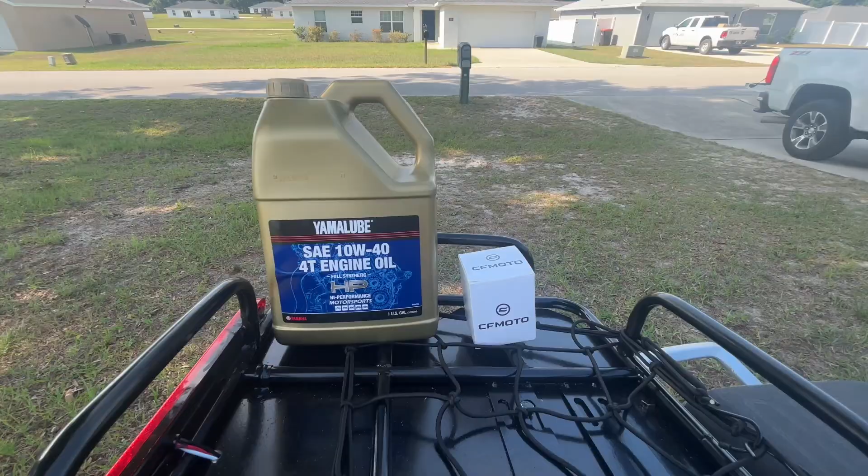I bought 2 oil filters and 2 gallons of the full synthetic high performance motorsports Yamalube. This is what St. John's said they would use if they were doing my oil change, and that this is what they think is the best oil for this. And again, this is basically a baby Tenere. I keep telling everybody it's the unicorn.

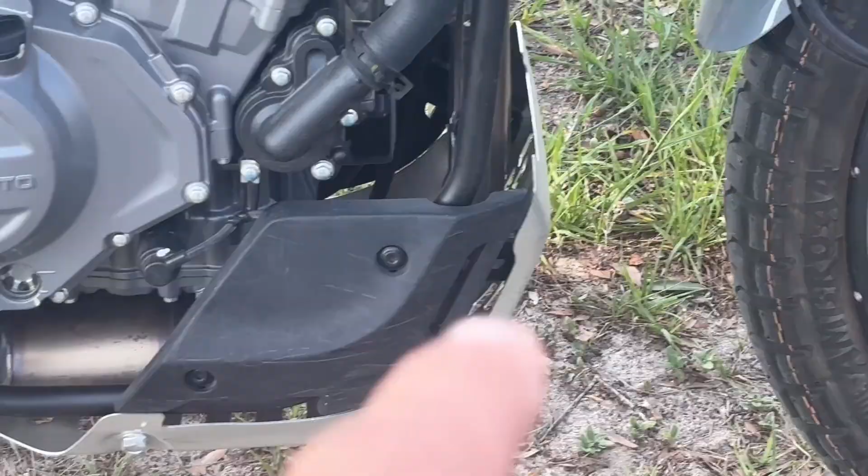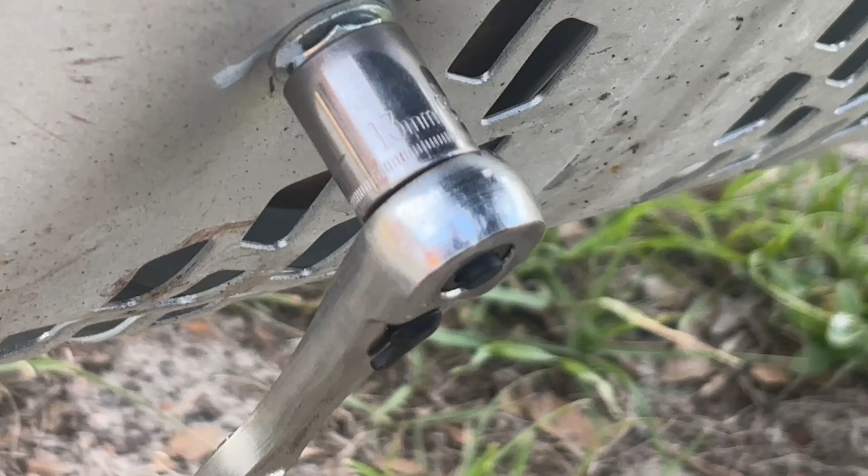So the front sprocket is also compatible with the Yamaha. And we will start off - I'll go ahead, I really don't need to, but I'll pull the skid plate off for this. That is a 13 millimeter, and you can use a 12 point, but I'm going to use a 6 point because you do better with a 6 point.

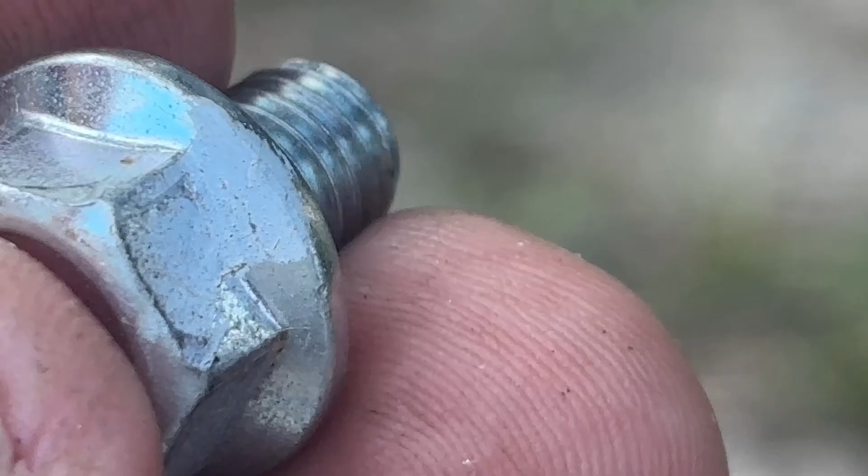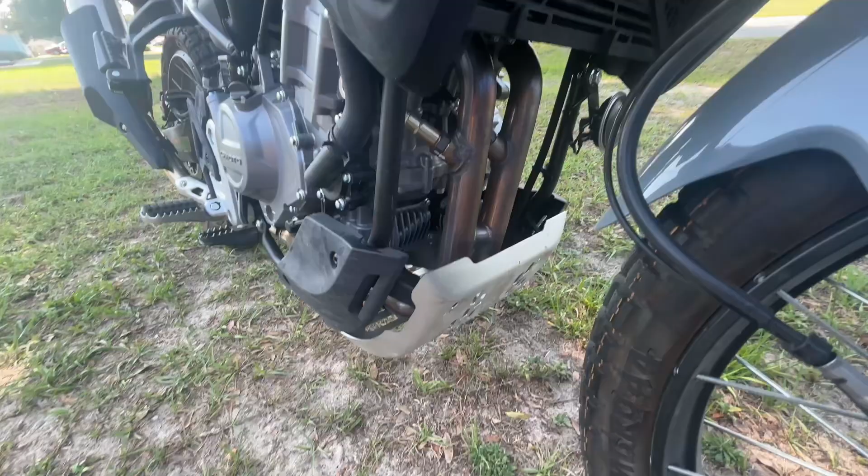Another shout out to CFMOTO. I've been telling you how they use the marking pen. They marked this bolt and they marked the hole where the head of the bolt lined up. We'll just back out of it a little bit to where you could tell when they were originally put on, so you could tell they weren't backing off. And they did that to all of them. So kudos again to CFMOTO. They seem to really be picking up where a lot of people have left off.

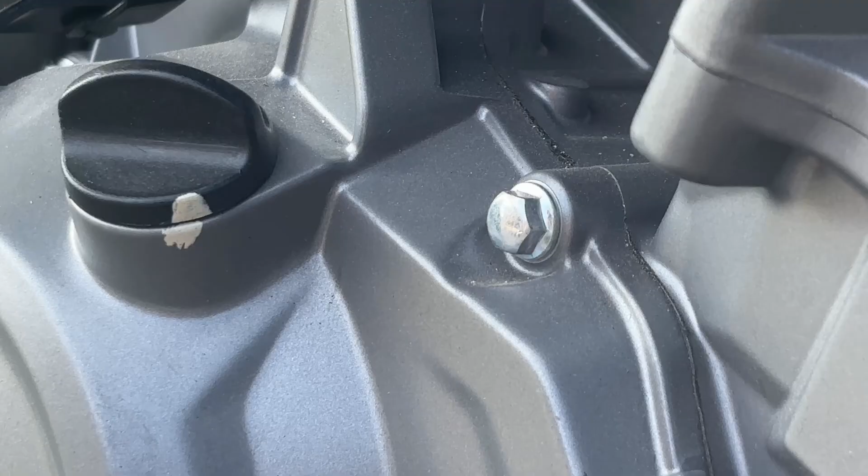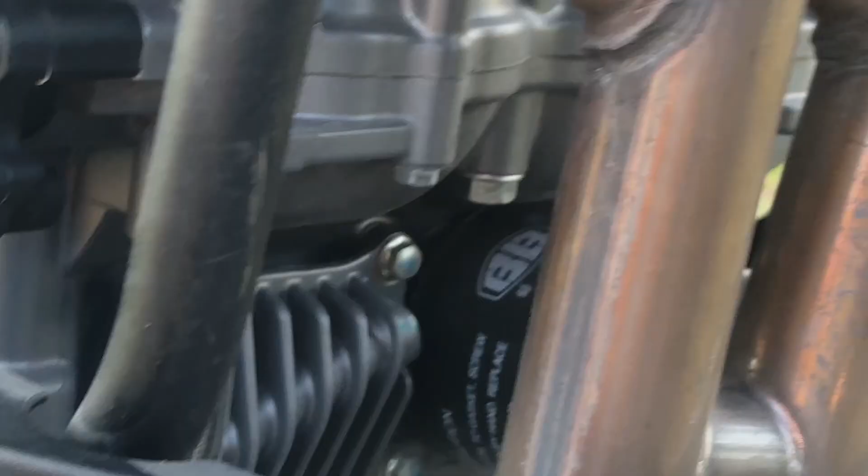And see, here's one just right here, and that's just the oil cap. I've checked the oil, I've removed that, but it comes back to almost the exact same spot. They do it here, I mean, it's on there. They do it in a lot of places that seem to be important. And that little booger right there, that's going to get replaced before I leave, that's for sure. So there we have it, 4 bolts, and it's off.

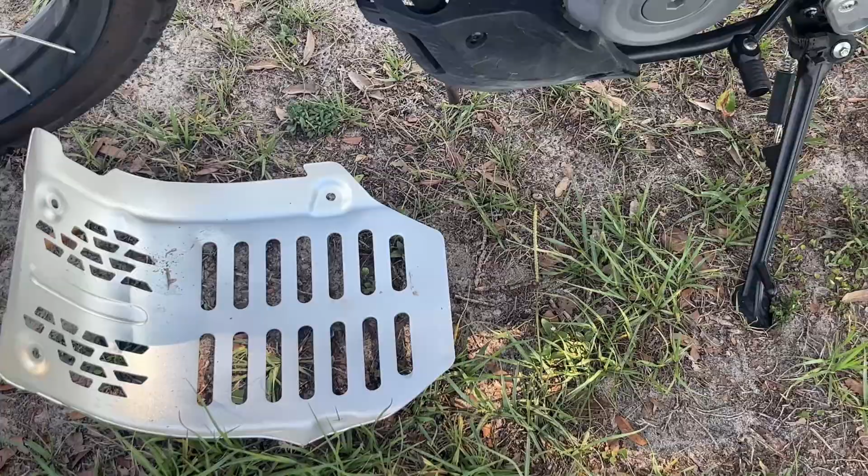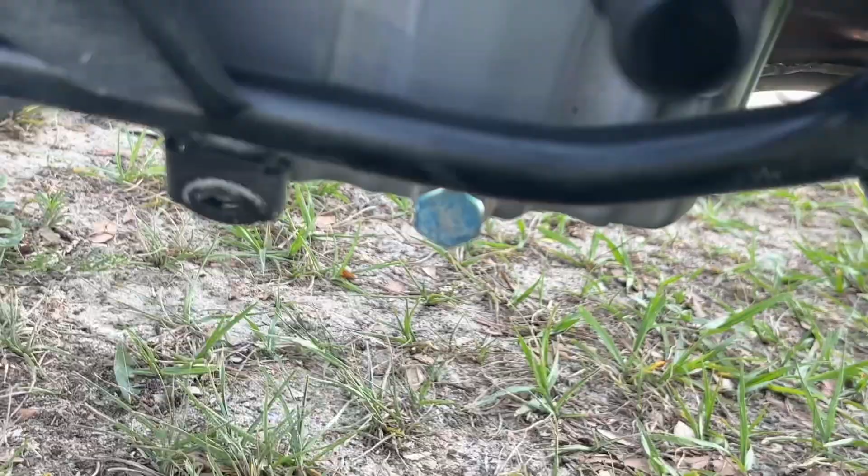Like I said, they're 13 millimeter, which is 1/2 inch. The nice thing too is your oil drain plug is on the side, at the low point when it's on its side stand. And the oil drain plug is a 17 millimeter. Now when you look at the drain plug, you can see the crush washer behind it.

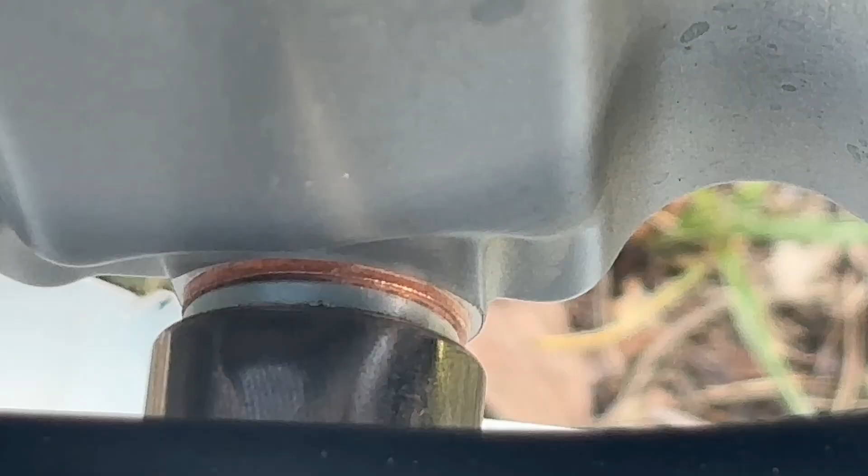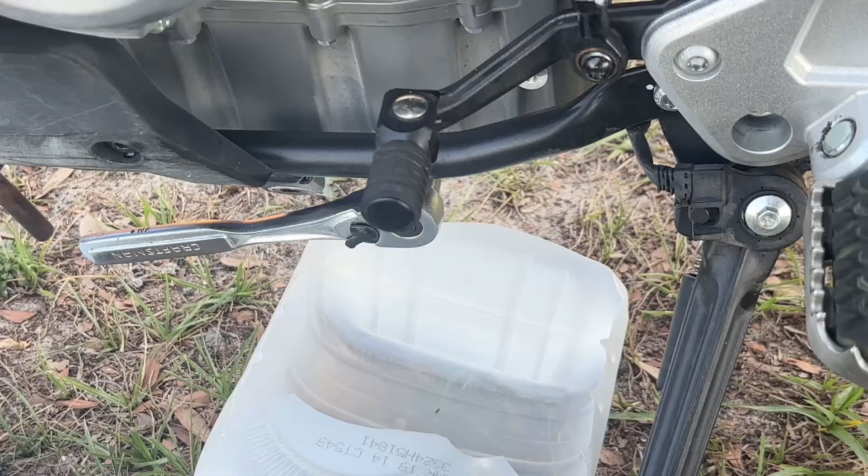Make sure you get a crush washer. Now I've been out in the field to where I just had to use the same crush washer, and I was able to turn it around and get a fresh crush. And now looking again, you see as I'm turning this out, see the blue mark? From underneath, that was in there tight.

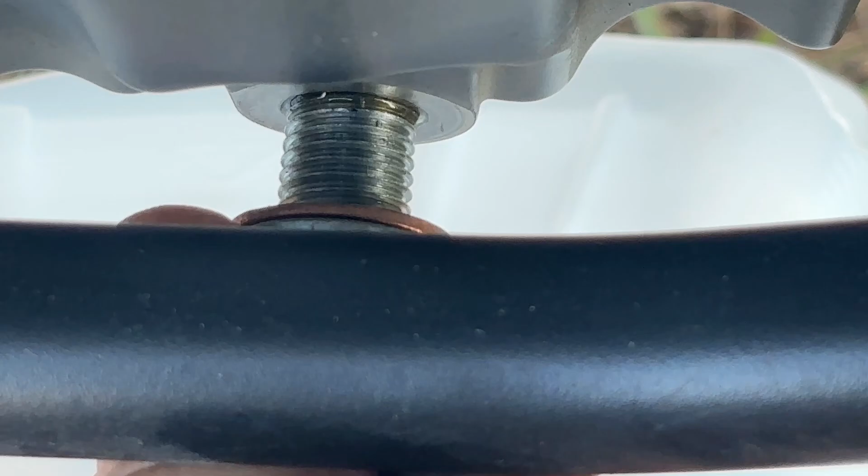And I'm gonna hold pressure against it, okay, till I feel it slide, knowing that it's actually all the way out, but I'm trying to push it in at the same time, because what that's doing is keeping the oil from going everywhere. So I'm trying to push it in while I'm turning it out till you feel it go past once. There we go, see that?

And there's where I bought my bikes. I bought the NK 450 first, and now I bought the MT or the Ibex 450 second. I bought them both at St. John's.

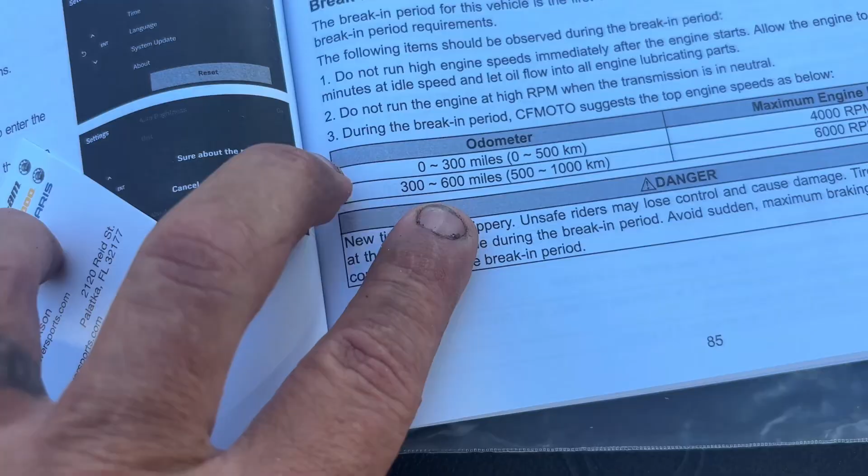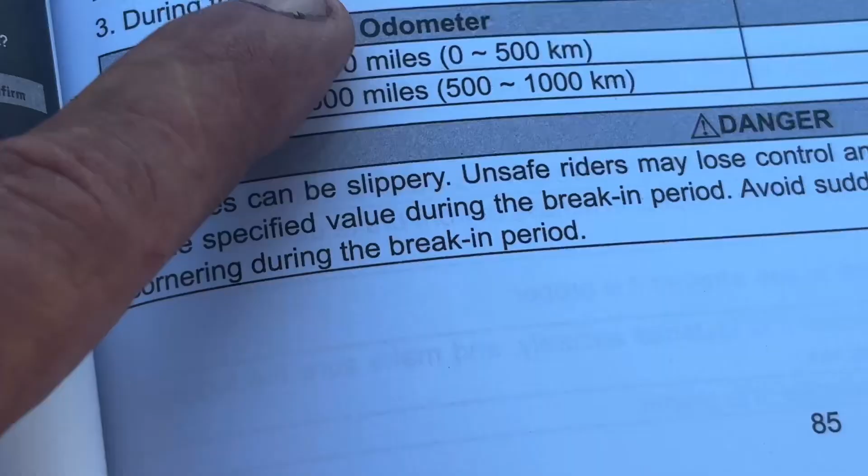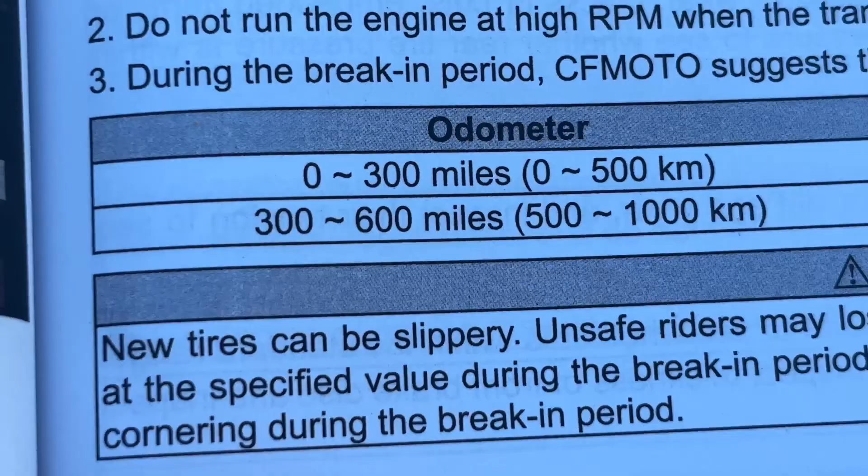And see, odometer 300 to 600 miles, which is 500 to 1,000 kilometers for your first oil change. So there you go, that's your proper break-in. You can go up to 600 miles. And when I went in for the sprocket at 450 miles, he said my oil looked good enough to go to the 600. I could have, would have, should have, possibly, maybe done this first, but I didn't.

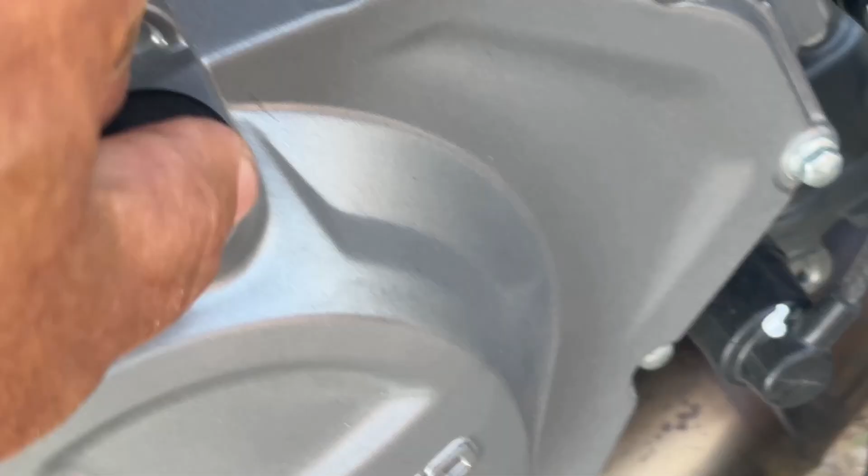So now we're going to loosen the oil cap. And again, see the paint mark? Redundancy, it's key, but I love it.

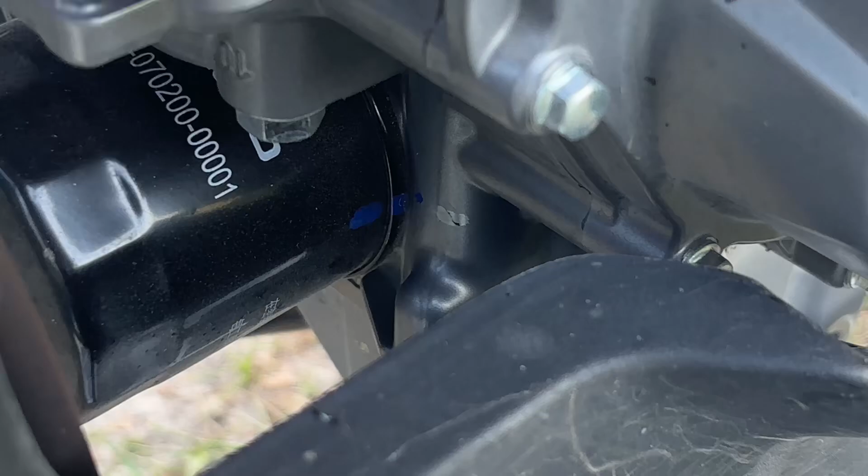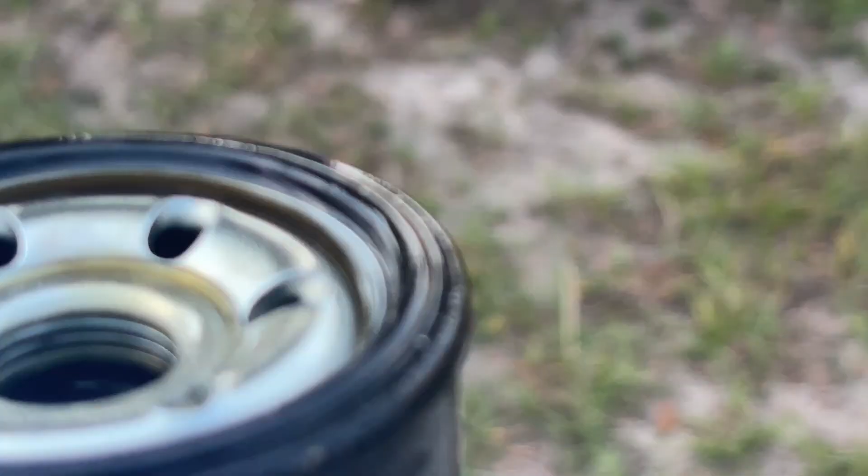I'll go pull my oil filter now, and I'll get you the amount of oil that it takes. And what do we have here on the oil filter? Again, it's marked where it was to ensure that it never came loose. When you take your filter off, you might want to check your box, make sure you got another rubber seal there, because you might need that. All right, right out of the box, we have our new rubber seal.

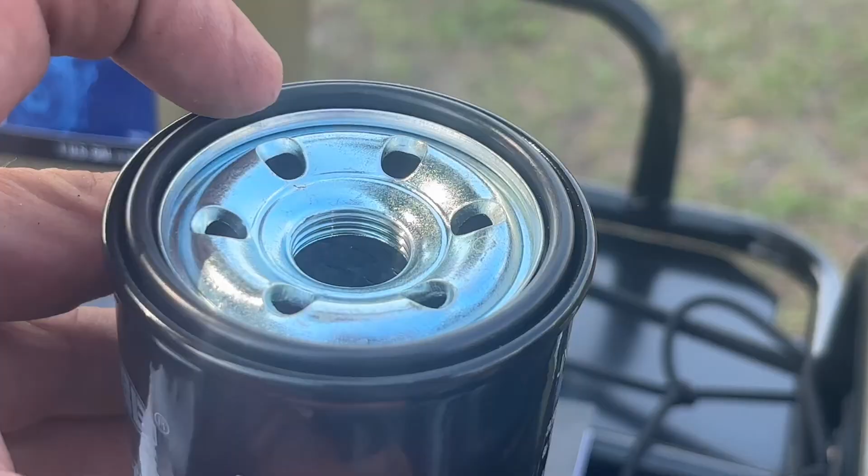Now you're going to want to take some oil and oil the threads and oil your seal before you put it back up. Always get it wet with oil. Well, there we go, it even says it: apply a film of oil to gasket and screw on filter tightly by hand. Replace filter every 6,000 kilometers or 100 hours.

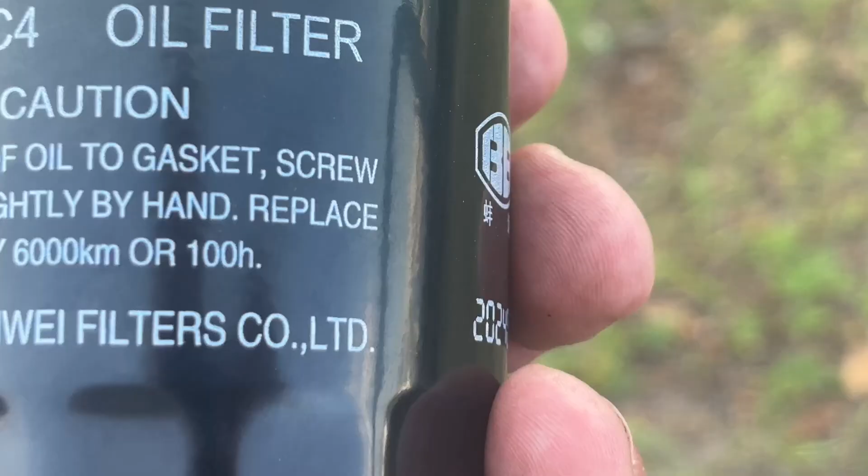So there we go. And 6,000 kilometers is 3,700 miles. So yeah, when you hear people saying they did 6,000 K, that's only 3,700 miles, so almost 4,000. The only thing I'm saying is, when I tell you I'm probably going to be doing between 11 and 14,000 actual miles, you know, because pin to pin was 10,000.

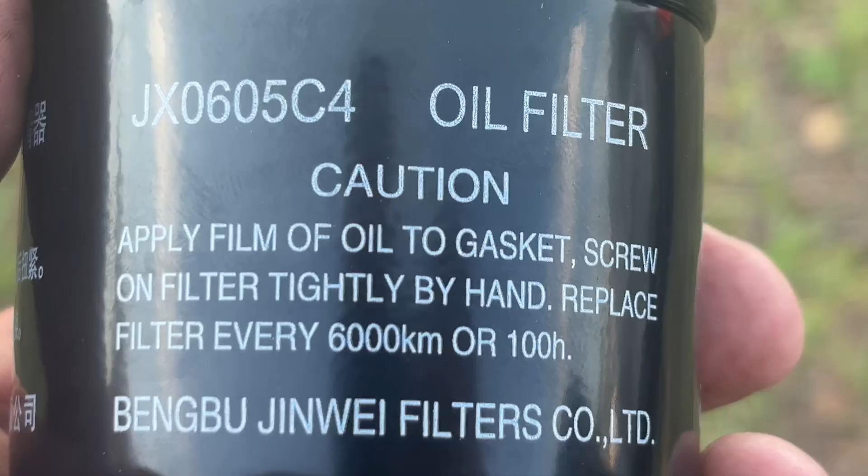So we're going to be close to 20,000 kilometers when we're done. Now you can see we've got our white and blue mark here, and if you look, that's pretty much even with the Chinese lettering just below the C4. Well, I don't know a veteran that doesn't love C4, so I won't forget. That's just below the C4 mark.

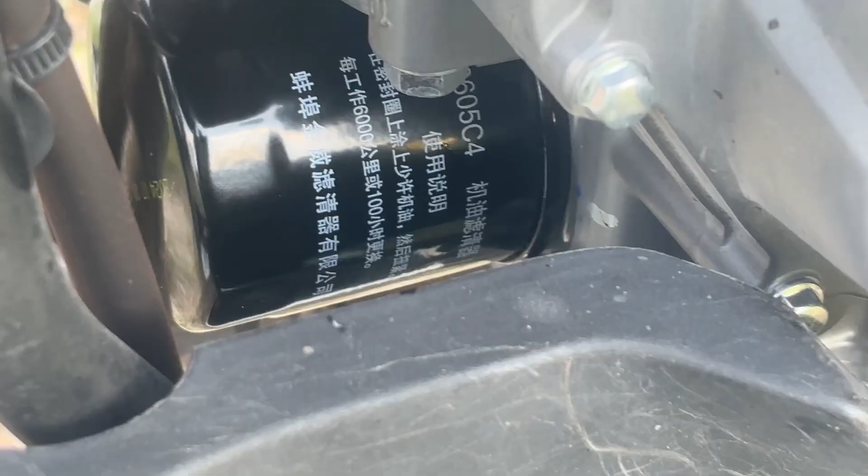Anyhow, you want to put this on hand tight. Now I got fairly decent strength, so I'm able to really snug it up really well. I can get my whole hand in here and everything. There we go, I even got more after it set for a minute.

So now we are at the C4 mark. Check that out, we're dead on the C4. And I'm telling you, I really put a torque on it with my hands as good as I could, and that was as far as I could go. But after it set, hey, I don't know, go figure, right? Anyway, it's there. So I'll never forget where that's at now.

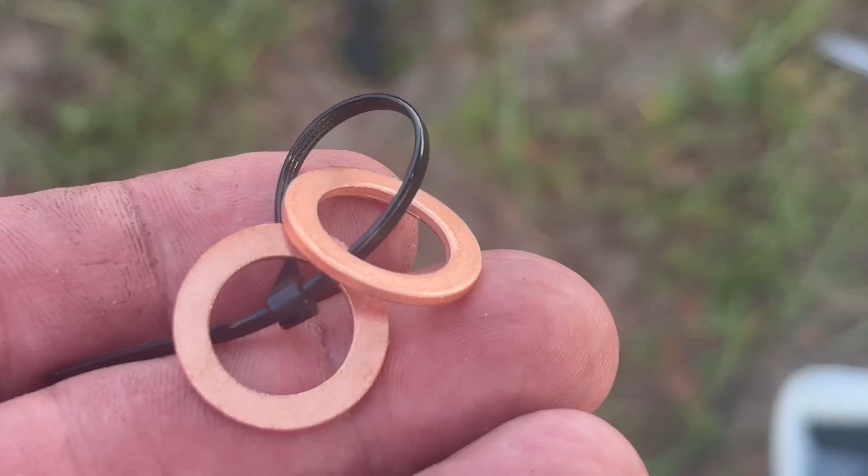So I did get 2 crush washers with the oil filters. In the past, even talking to a friend of mine, we've reused crush washers for multiple uses, but they don't recommend it at all. I would turn it around once without any hesitation. You should be able to get 2 oil changes out of a crush washer, but that's against every rule, every law, every book. So don't do what I do, as I say, not as I do.

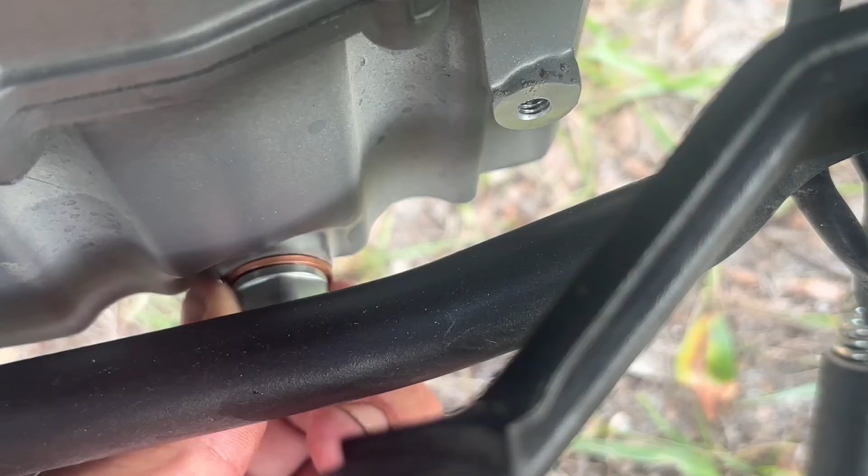Yeah, there you go, oh my God, I'm my dad. You see this? Hand tight all the way in. You should have absolutely no problem putting that all the way on before you put a wrench on it. And make sure your crush washer's in there before you put the bolt back on.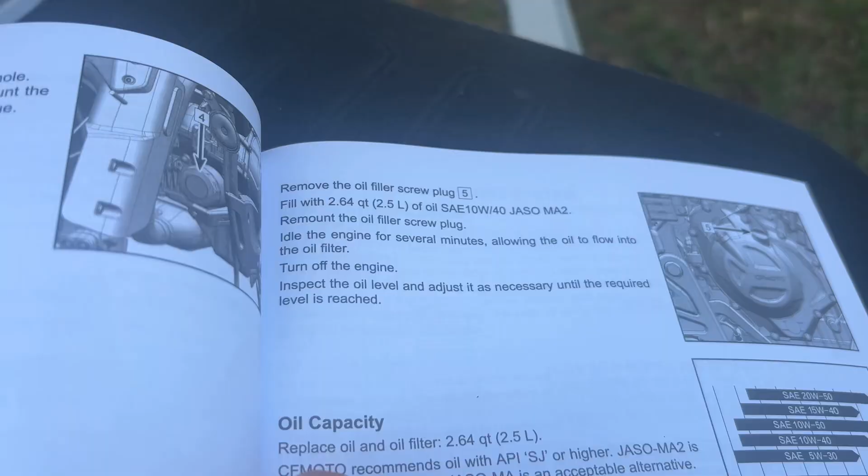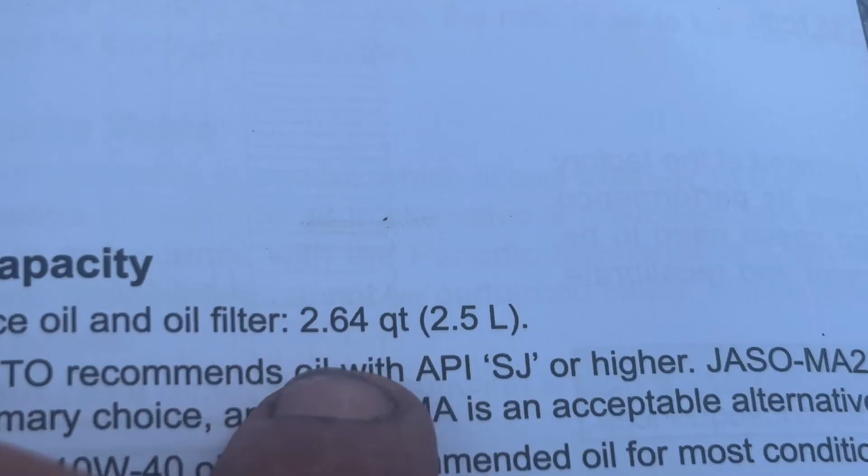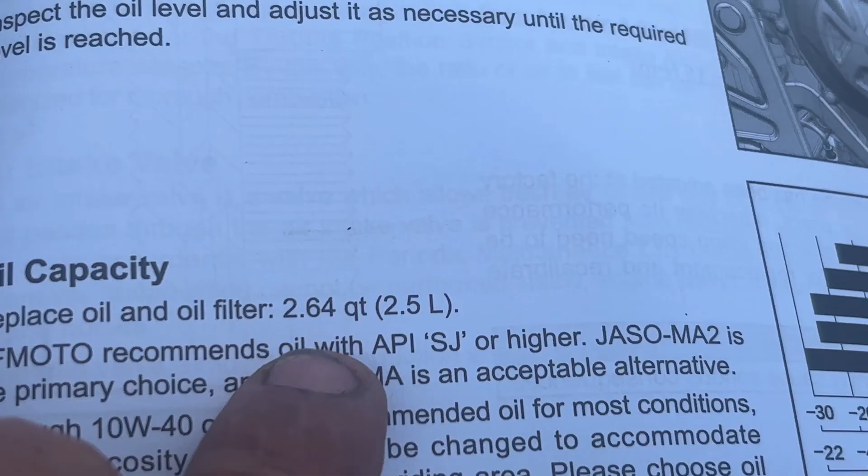It says first remove 2.64 quarts, and then it says replace 2.64 quarts. Go figure, 2.5 liters, my friends. So there's 4 quarts in a gallon, so I'm going to actually have 1.36 quarts left times 2. So guess what I got? I have enough for 3 oil changes because I bought 2 gallons.

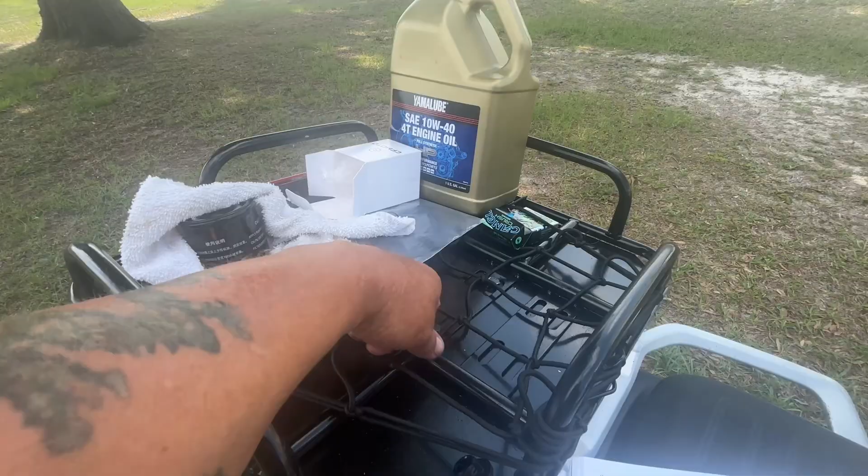Anyway, I'm gonna bring the oil and the other oil filter for my other oil change, along with the extra crush washer. Don't forget those.

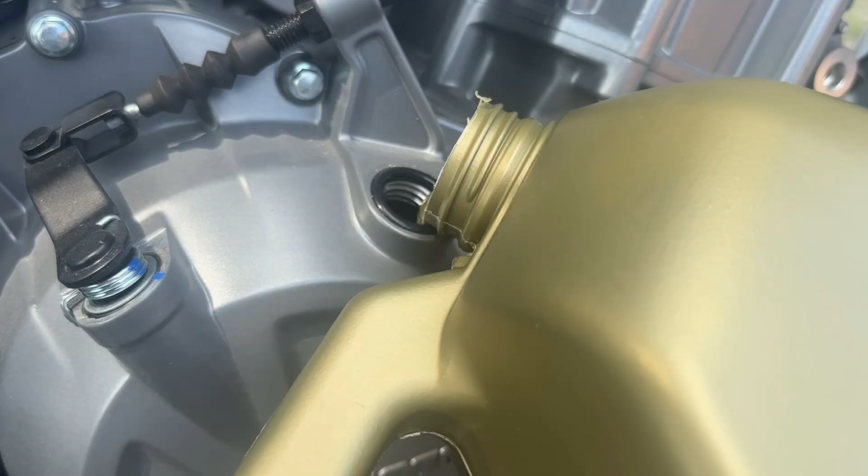I recommend, if you haven't done this, getting a small funnel. But if you're gonna pour from the jug, the secret is not doing that—don't do that. You got to turn this to the top, turn your spout to the high side. Okay, I'm holding the jug, leaning it on the engine block, because I'm holding the camera in my other hand. Otherwise I would hold that about 1 inch high.

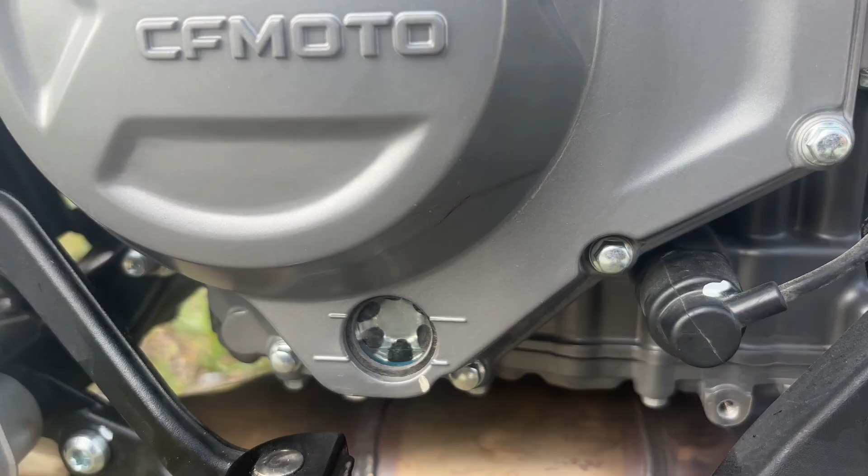I'll show you, I haven't started it yet. So when I stand the bike upright, it's just maybe slightly over the line, but we have not started the bike yet. So once that goes in the filter, I imagine it's going to be down between the 2 marks, maybe 3/4 of the way. We'll find out here in just a second.

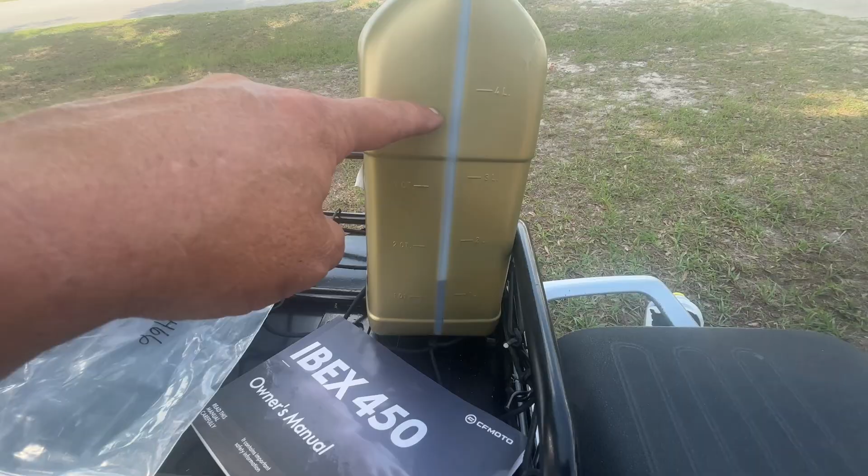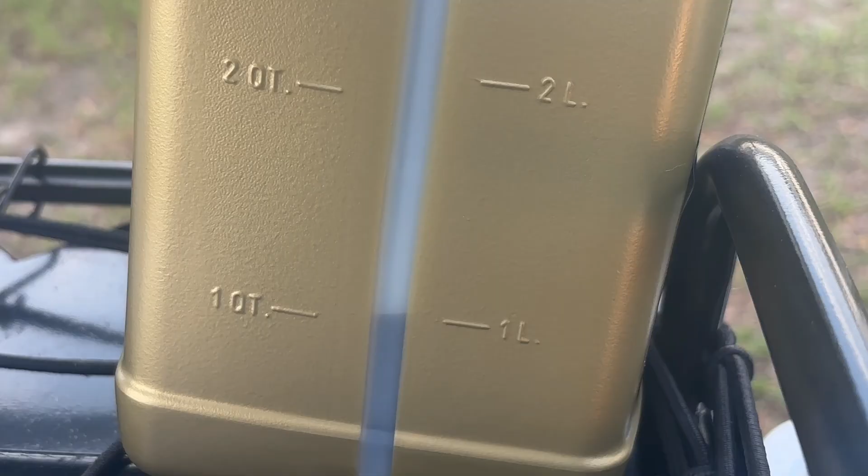We know we're good. You start off here going in reverse, 1, 2 quarts, so you're going to be just over halfway down. So if that's 2.5, you want to be just under it. And when I hold the jug up straight, because the bike's leaning, we're right about the 2.5 mark. And we're good on the oil mark. So let's start her up, find out.

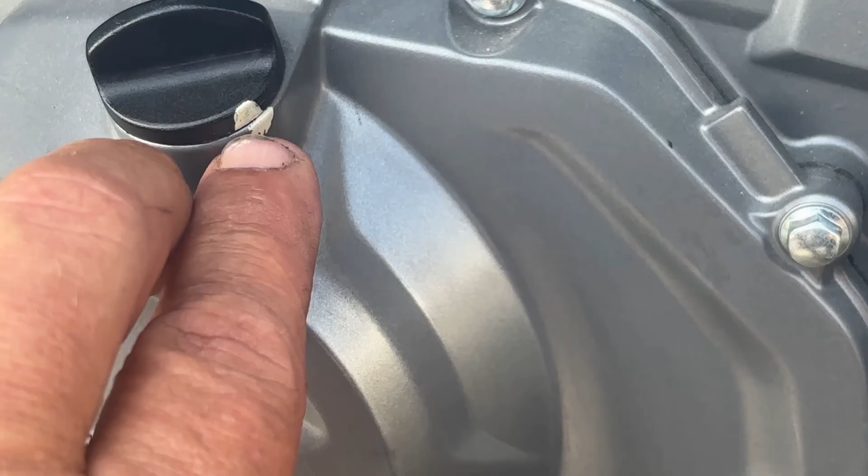Putting the oil cap back on, now that's been on and off a couple of times, it's just slightly past the original mark. See, they even did the springs. I'm telling you, they really do these things right.

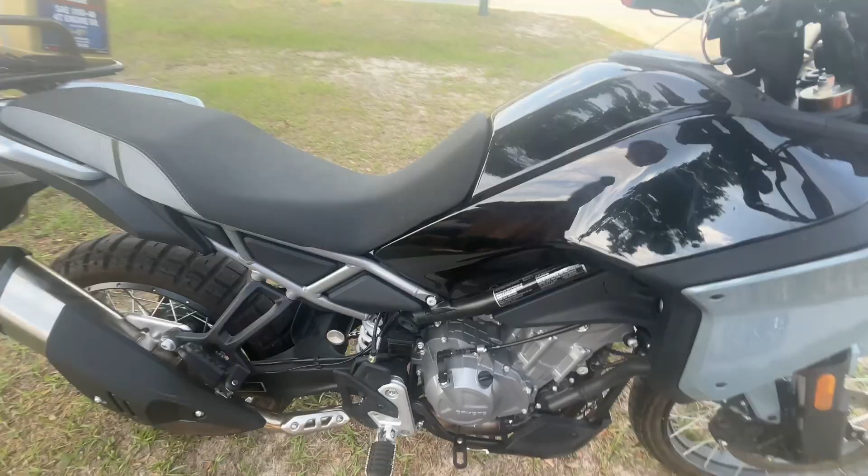So with that being said, let's start it up. We'll let it idle for a minute, and then we'll check it, turn it off, let it settle. But I'll let you hear the first startup.

I do got my water jug holder there, so I have water until I get a CamelBak. I got to get a new CamelBak.

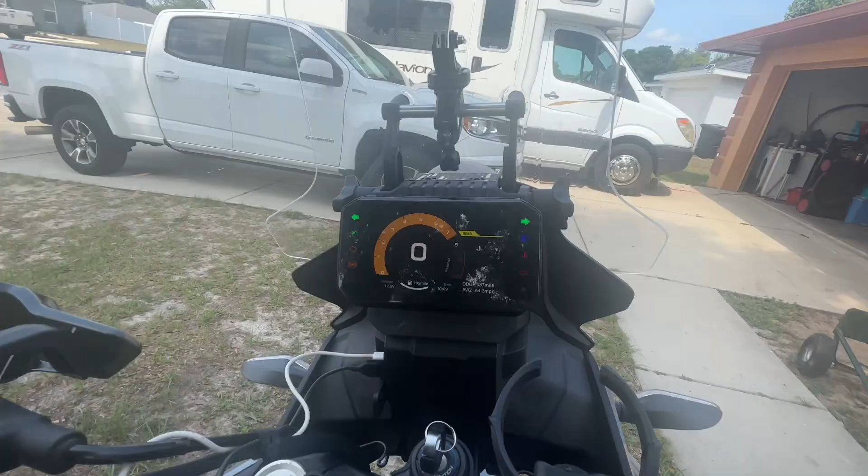All right, so we're in neutral, and we're going to start it up. There we go. Let it idle for a minute. Circulating that beautiful new oil.

You notice I let it run for approximately a minute before I even just barely loosened the throttle to push out the oil. Now we'll let it settle for a minute and we'll check it.

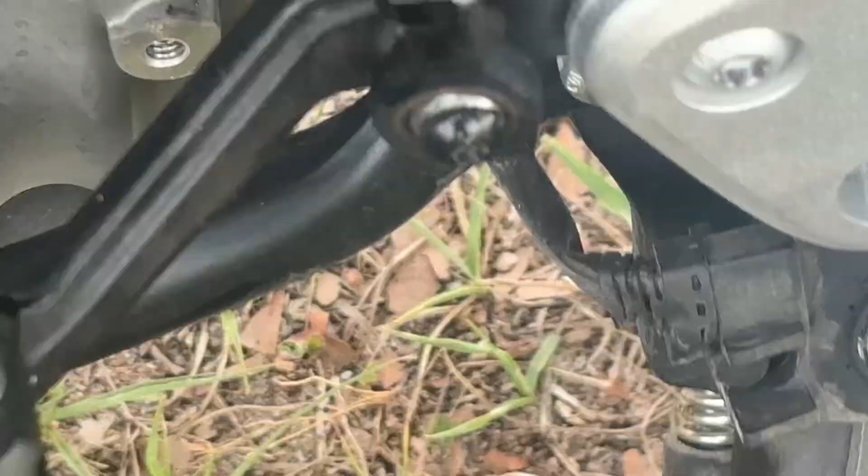After you run it the first time and get it to full operating temperature, I suggest going back and seeing if you can't hand tighten that any further. Like I said, you check your oil plug, see, perfect, no leaks.

Shouldn't, but there's not. But I would definitely put another hand on that oil filter and just make sure you can't get a little more snug once she gets warm, and while she's warm, just as she's starting to cool off enough to touch it.

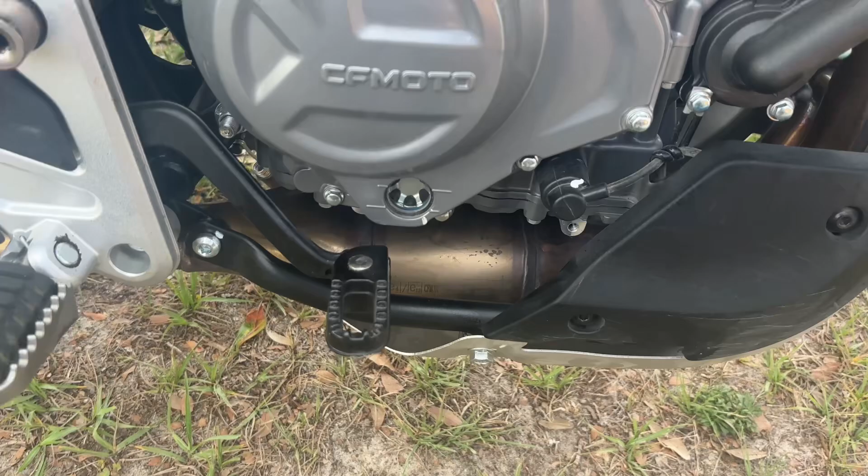I've added oil twice more, just barely, and it gets us right up to, when I put the bike up level, just below the full line, which I'm good with because that's right at it. And it was halfway when I picked it up from the dealer, so it was about dead in the middle.

And I have the motorcycle cradle in the garage that I put it in, and that holds it perfectly straight up and down. I'll double check it there.

But what I will tell you is I started it twice more. I rode it around the block because you got to remember, this is one solid case. So from my understanding, your clutch, your gears, your transmission, your engine, everything all runs through this oil. So get it out, shift gears, get everything lubed back in the gearbox. Allow your oil filter time to absorb any oil that it's going to take, just to maintain.

And then that was after I started it, and I ran it sitting here 3 times before I took it for the ride. After I took it for the ride, came back, it's at the exact same spot. So we are good.

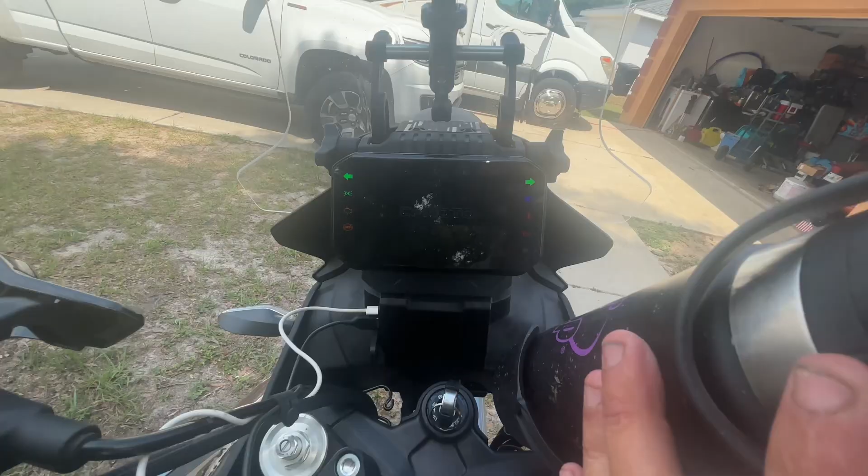Oh, and the mileage, I said I thought it was 588. Check it out. We are, come on now, 587. See if we can get it to focus. Right there, 587 miles. So we're perfect for our 600-mile oil change.

And like I said, the book says 3,700 miles every time after that. And that's what we'll do.

Okay, and lastly, you can see there's no marks on that. So it's raw copper. This one has a few little lines on it, and you can tell that it's been pinched. But I'll show you the other side. It doesn't look much different, okay? Still maintained a nice flat surface.

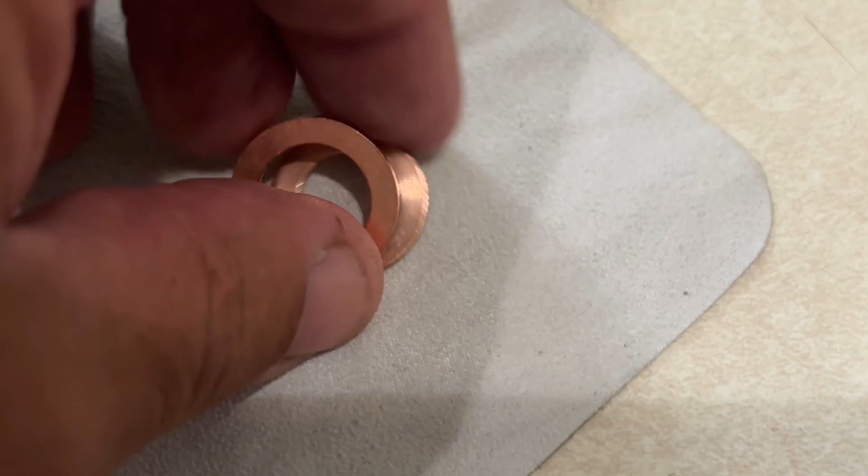I'll show you where the difference is. It may be slightly thinner, but not enough so it'd make a difference that you couldn't use it again. I mean, we're talking the used one's on the left right there, the shinier one. The new one's the dull one, see?

And it actually, it's still as thick. So that's why I say, keep your crush washers. I bought new ones, but that's why I said you could absolutely get away with that if you needed to all day long.